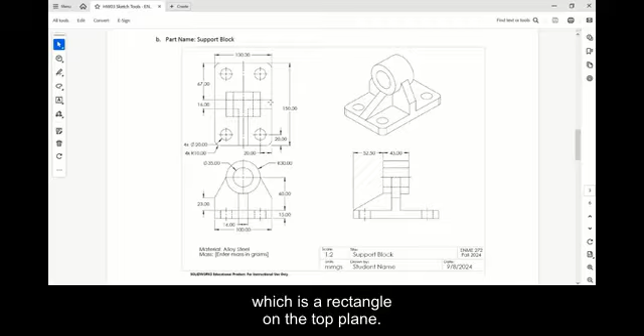Hello everyone. Today we are going to work on homework 3, problem B, support block. As we look at this part, we are going to start by creating the base, which is a rectangle on the top plane, extrude it, and then add this feature and do the rest. There's a couple of extrudes and extrude cuts.

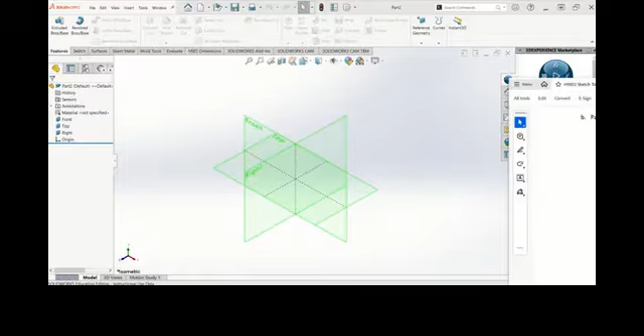Then I'm going to go to SolidWorks. Create a new part. Let's check the unit, it's going to be millimeter here, right? Then we don't need to change the unit. As it is millimeter, I'm going to go to the top plane and create a new sketch.

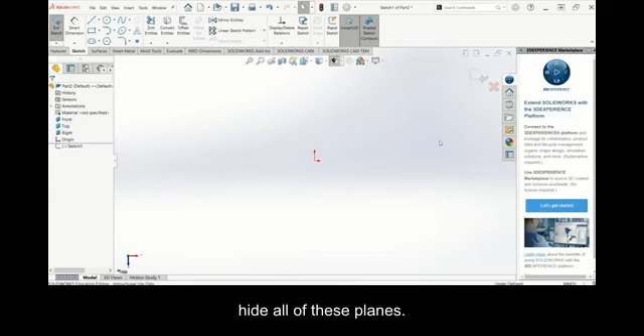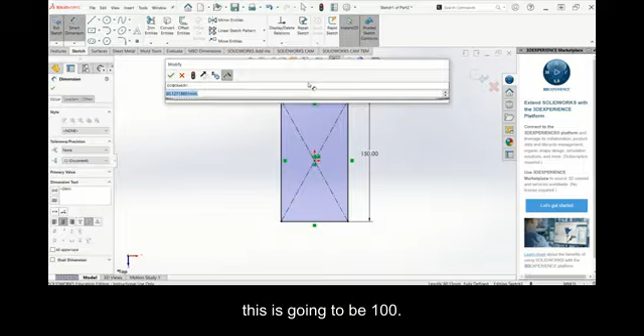Okay, let's have this here. Hide all of these planes, and now I'm gonna do the center rectangle. Dimension is gonna be 150, and this is gonna be 100. Now I'm gonna extrude this by 15.

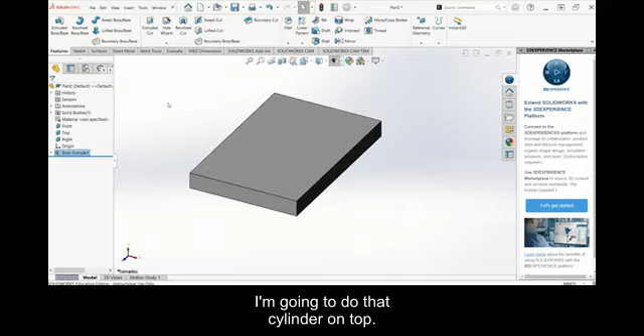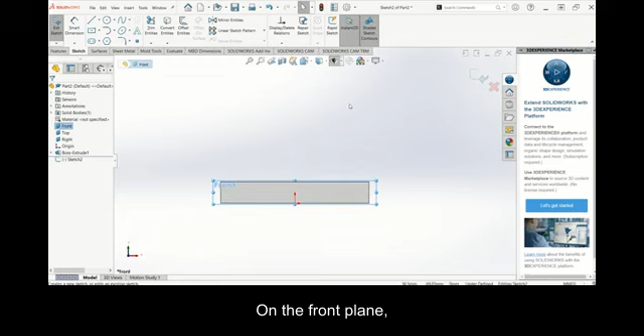Okay, that's the first part. Now I'm gonna do that cylinder on top. How we are gonna do this? This cylinder is gonna be created on the front plane. While we are in the sketch mode, I'm gonna draw, first of all, let's do this center line here.

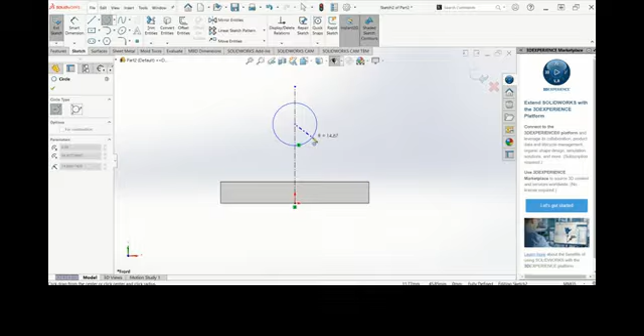Okay, now I'm gonna draw a circle. The radius of that circle is gonna be 30. Now the distance between this and this line is going to be 60.

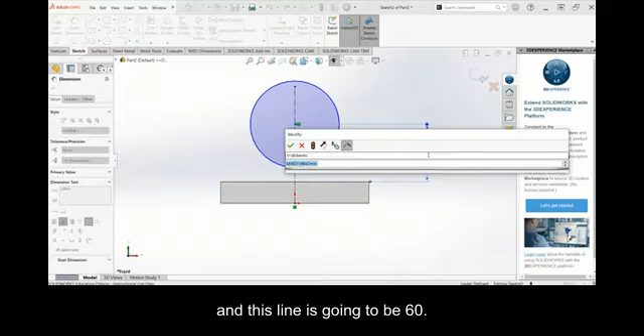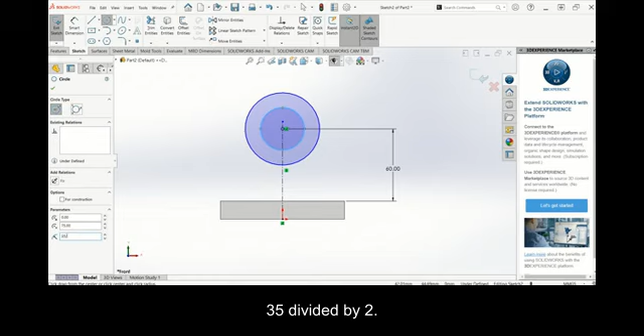Okay, we are going to draw another circle here. This is going to be 35 divided by 2, because this is radius. Click OK. Now let's make sure which dimensions we have here: 60, 35.

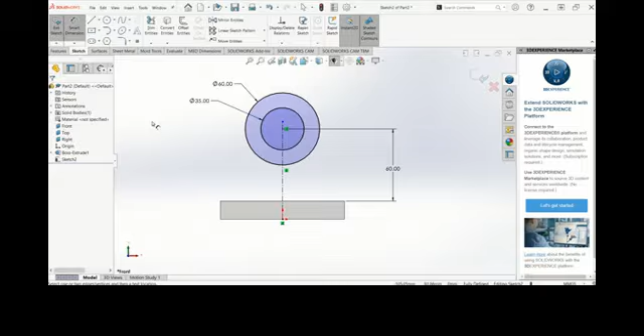Okay, now we're gonna use the extrude feature. We're gonna extrude this. What we are gonna do here, we are gonna use the mid plane, and this is gonna be 45.

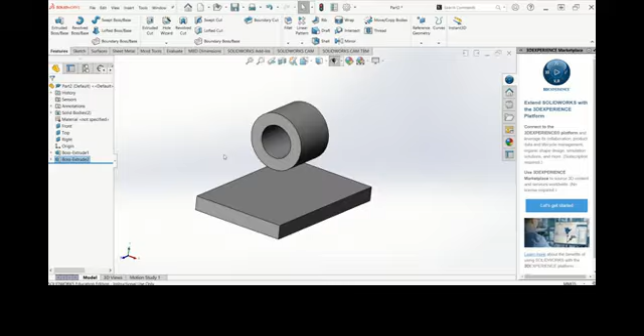Now the next feature that we are going to use, I'm going to create this feature here, which will connect this cylinder shape to this base feature. Again, I'm going to go back to the front plane.

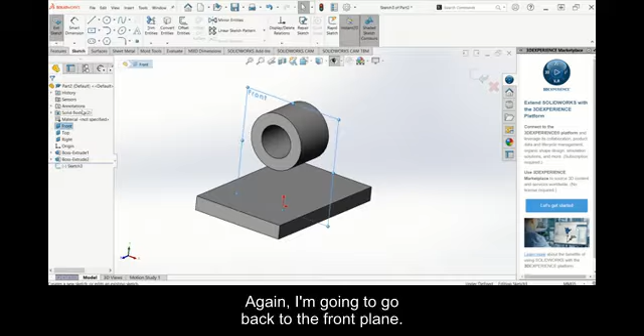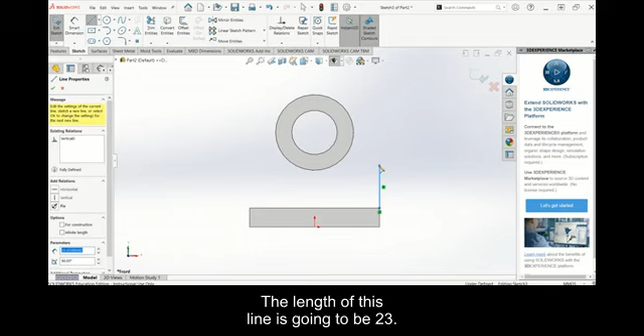What else am I gonna do here? I'm gonna draw a line from here, a straight line. The length of this line is gonna be 23. Now from here I'm gonna make sure it's going to be selected to here, right, this middle here.

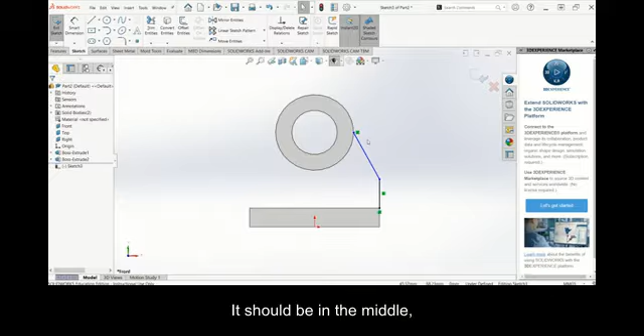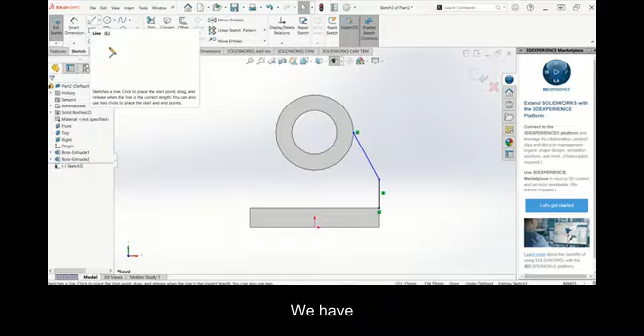This should be in the middle, aligned with this center point of the circle. We can add a relation, or I check that visually, by when I created that, right, it's going to be aligned with the center. What else will we have here?

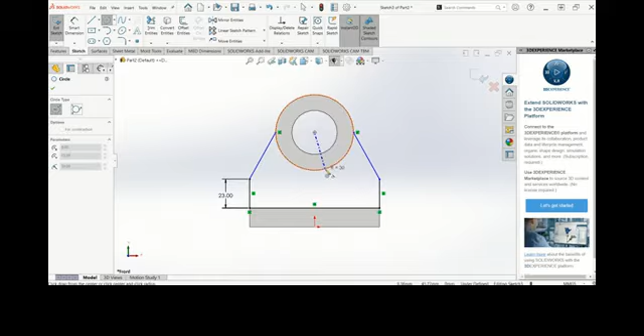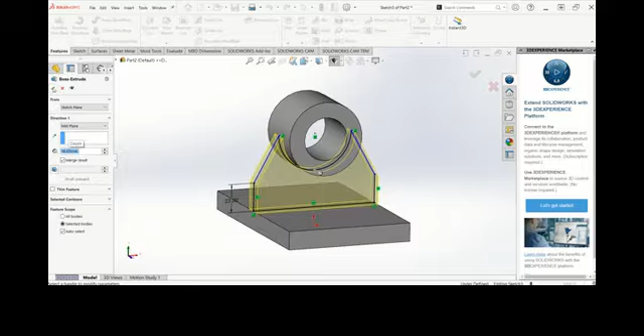Okay, how much is this going to be? 16.

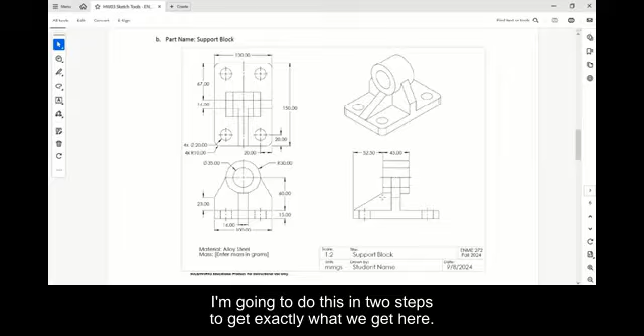Now the next part is going to be this feature here. Let's show you what we are going to do right now. It's going to be this feature here, right? I'm going to do this in 2 steps to get exactly what we get here. One is going to be this rectangle and extruded, and then this triangle and extruded.

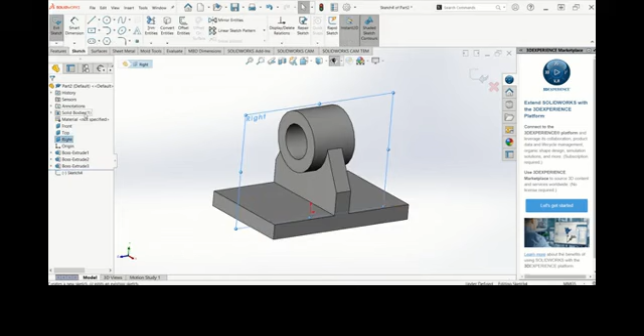We are going to go to the right plane here. Okay, this is going to be a corner rectangle. I'm going to start from here and go a little bit up here. Okay, we are going to extrude this. How much is this? Going to be 16 again.

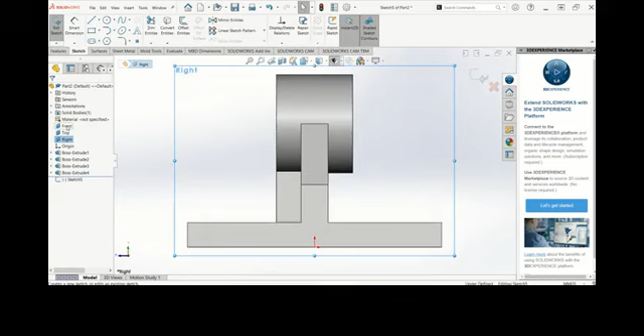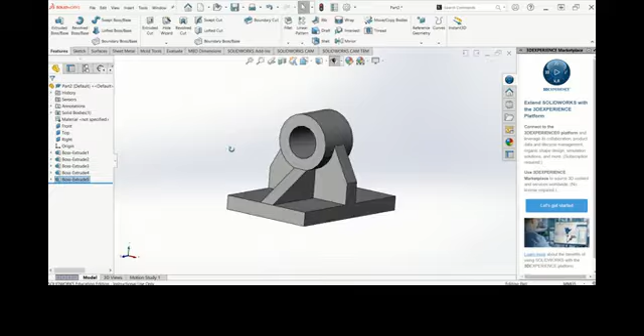Okay, the last thing here, the holes on the corner and the fillets, right? What we are going to do here, I'm going to do the holes. So like this hole, this face, like this, Control 8, I'm going to draw a circle here.

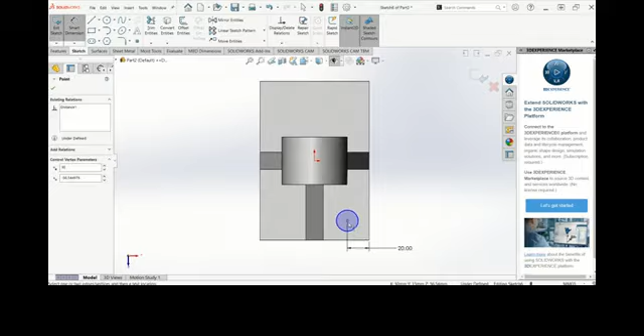This is going to be another 20 here. Okay, now when we have this, we are going to use mirror entities to mirror. We need 3 more here, right? Mirror entities, mirror this.

About, we are going to need to do, we're going to the right plane. We open this arrow here, you see the arrow? We use the right plane.

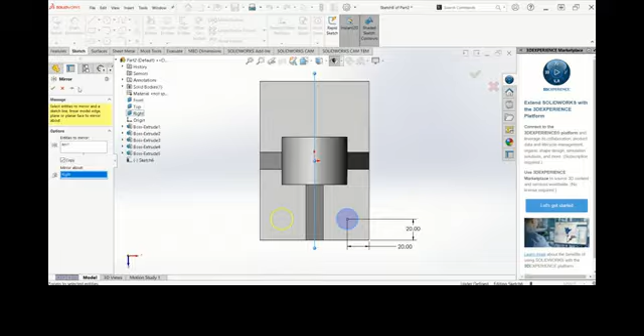We are going to mirror again this circle and this circle about the front plane. Good.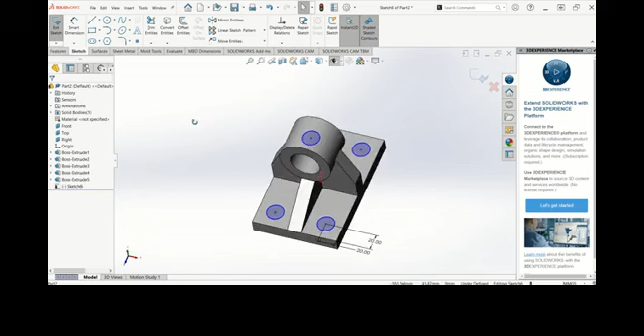Extruded cut here. I'm going to go through all.

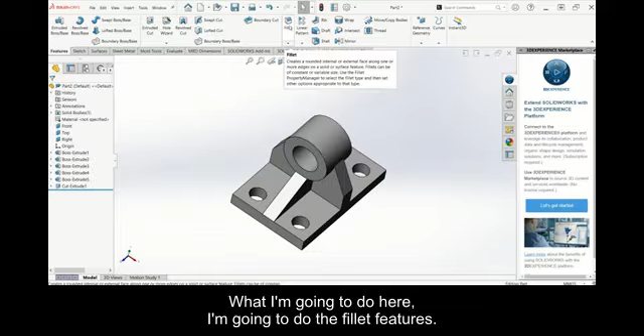And the last one is going to be the fillets. We can do the sketch fillets. What I'm going to do here, I'm going to do the fillet features, right, but we can do the sketch fillet as well when we create this rectangle. I'm gonna go to the feature fillets. This is gonna be the radius is gonna be 10.

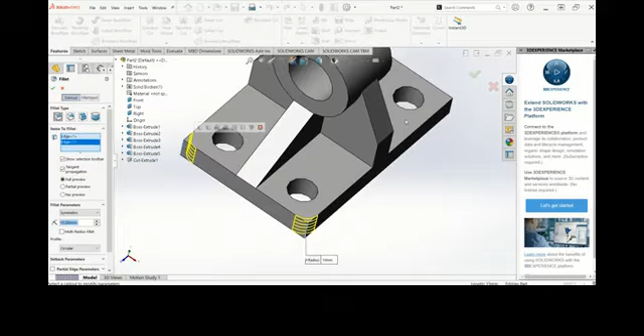Alright, it's gonna be this here. This is 10, 10. Select this. Good.

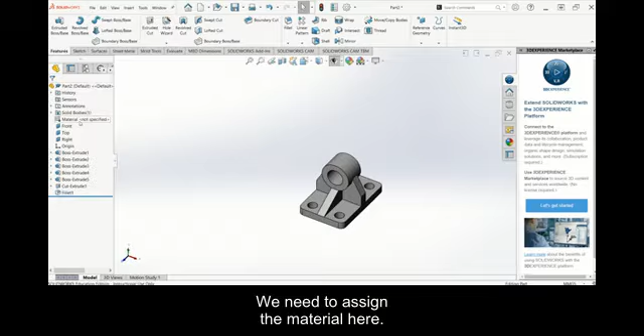When we have that, I think this is done. We are going to need to assign the material here. It is an alloy steel.

This is going to be, save it as a support block.

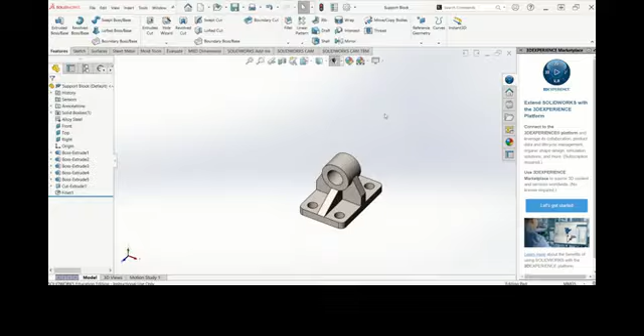Okay, we need to create a drawing for this part. I'm gonna bring the front view, then it's gonna be top view, right view, and isometric view here.

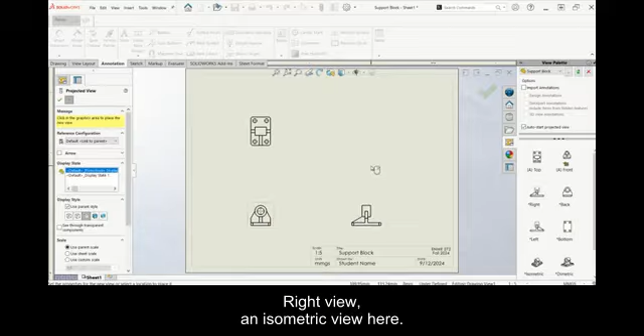Okay, this is gonna be, this is the whole, the scale is going to be 1 to 2.

Okay, the next step is going to be adding the hidden lines. Select this view here. Select hidden lines here. Select the isometric view to remove the hidden line from isometric view. For the rest of them, they have it.

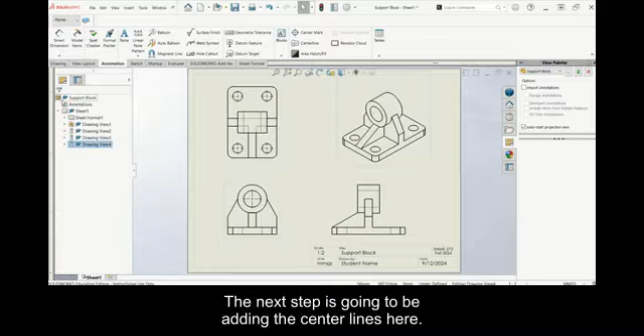The next step is going to be adding the center lines here. We have several center lines here that we want to add. This is one of them.

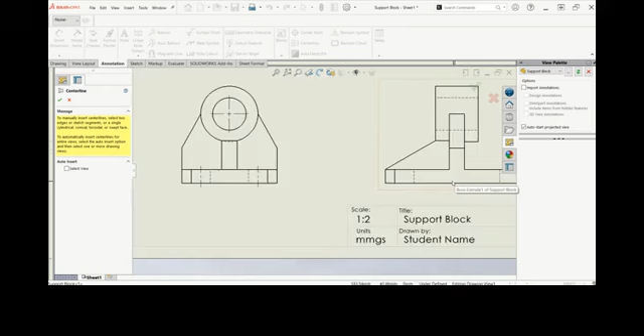Here the hidden line is exactly aligned with the line of the fillet. That's the reason we don't see the second hidden line here. This is behind the solid line.

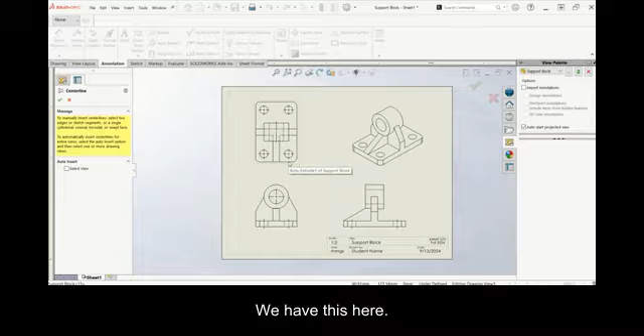And we have this here. What else here? Okay, click OK. Now we're going to do this.

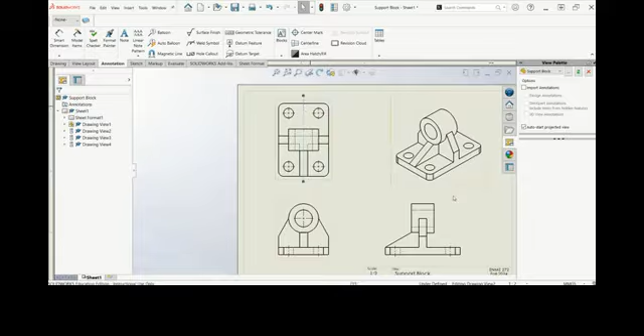Drag this here. Oh, another center line here. This line and this line. Okay, these are the center lines.

Extend this center mark here. Okay.

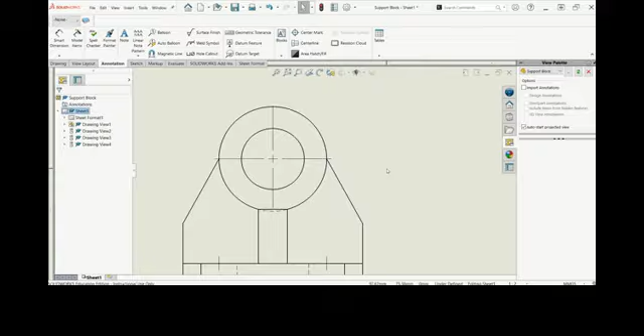Now we want to add the dimensions, right? We can add dimensions here. Oh, this is going to be 150.

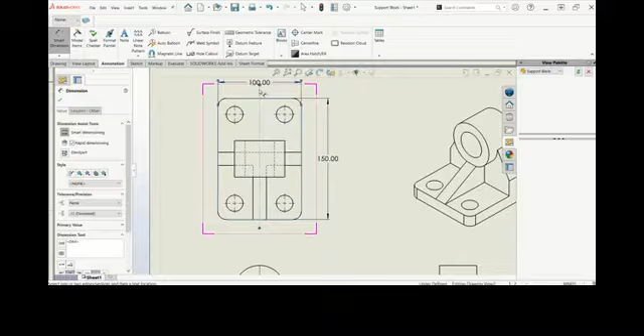Make sure these center lines are not going through the dimensions, right? We don't want that.

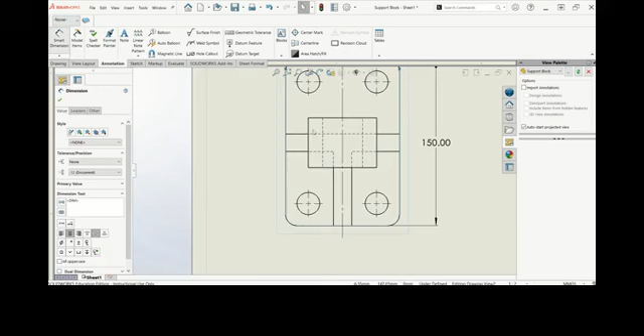Now we have between, 67. This is going to be 16.

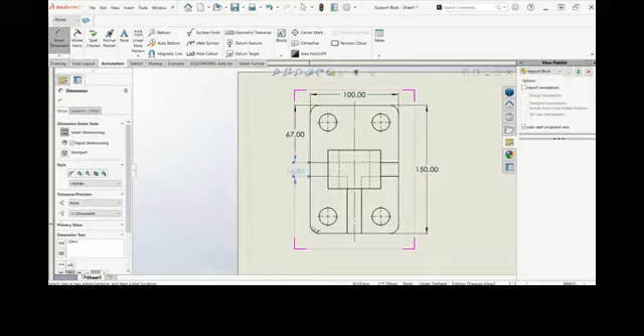Fillet here, this is gonna be 4 times. We go to the dimension text and 4 times. Okay.

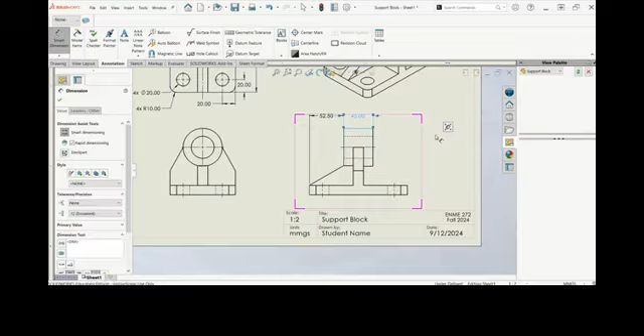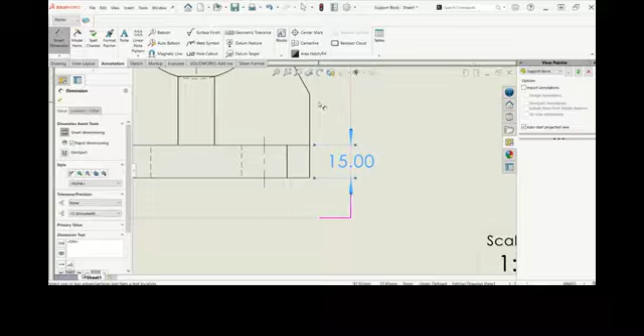Okay, this is gonna be between, okay, this is gonna be between this point is 23. This is gonna be 16.

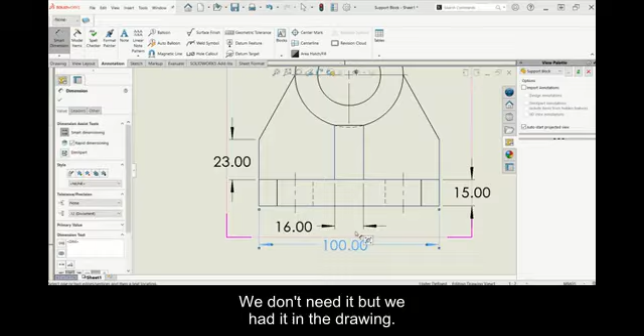This dimension is extra, we don't need it, but we had it in the drawing for now, and we need to remove it for next semester. It's okay here. What else here?

The last one is going to be the distance between this line, okay.

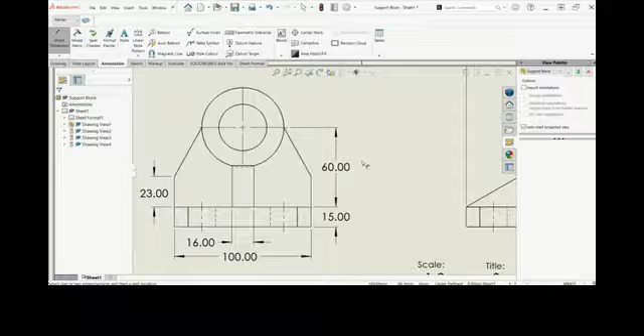Let's remove this 100. We don't need this because we had it in the top view. What else here? We have this dimension and we have a diameter of this circle here. I think we have everything here.

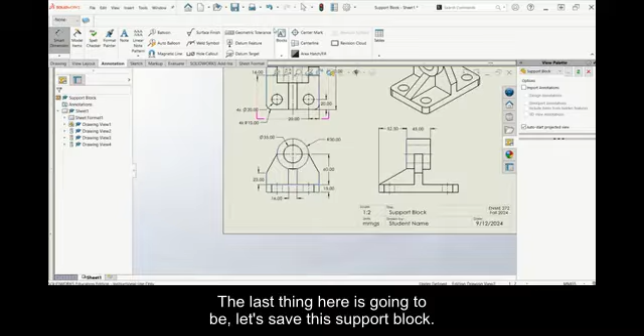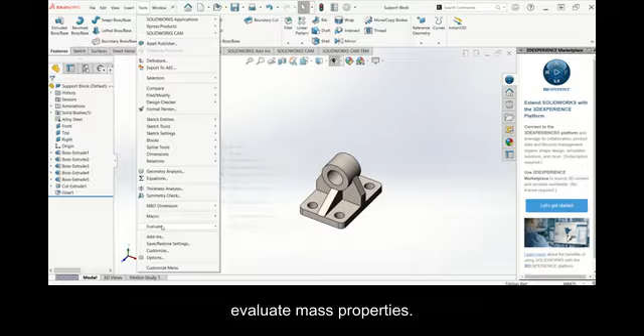Alloy steel. To find the mass, we go to tools, evaluate mass properties, and this is the amount of the mass there.

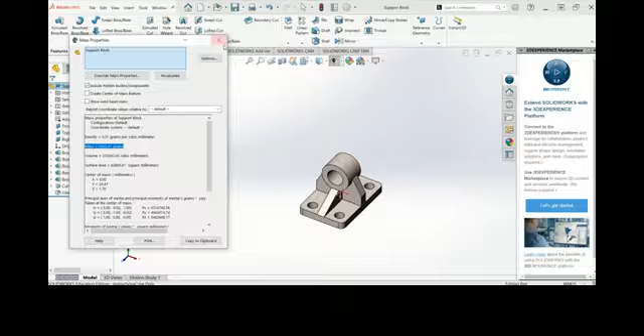Okay, this is going to be material. Alloy steel.

The mass will be 2852.41 grams. Okay.

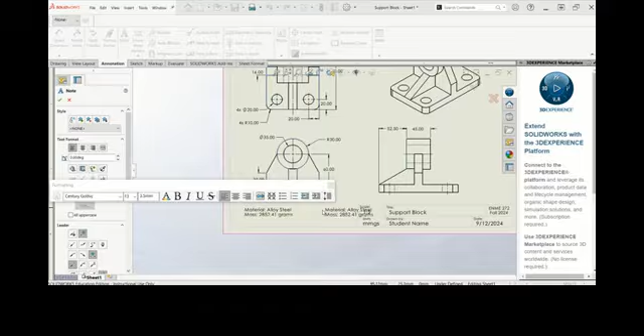By doing this, we almost done with the drawing, right? A good file.

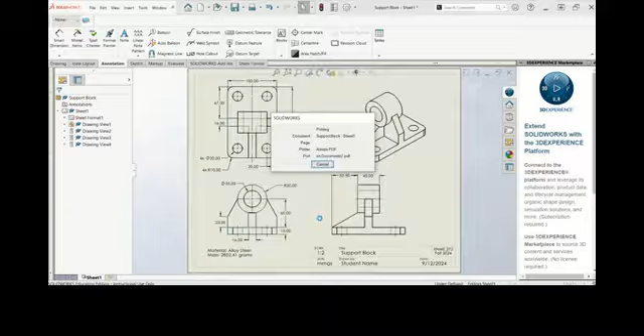It's going to be print. Adobe PDF. Save it as in documents.

Okay, this is the drawing I just created. Just make sure you are updated your name here, otherwise this is good to go.